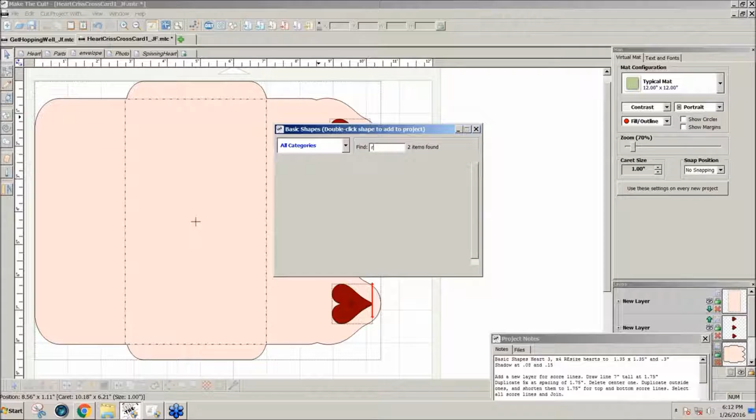So for this one, let's send it to the top here. When you have something selected, you want it to go to the top layer, click on the smaller of the two green plus icons, and it sends it to the top layer so you can work with it. You can just drag it over the existing one, double click and click again to get these angle arrows here. I'll go back to the green mat here so you can see.

I don't need it quite that big. What I did was I started with a 9.75 on the bigger of the two rectangles, 9.75, tab over, and 7.5 inches for the height, and enter. So this is what I started with.

And then again I can do Shift and Control, hold that down and click. And then I'm going to click on the fourth icon from the left to rotate that 90 degrees.

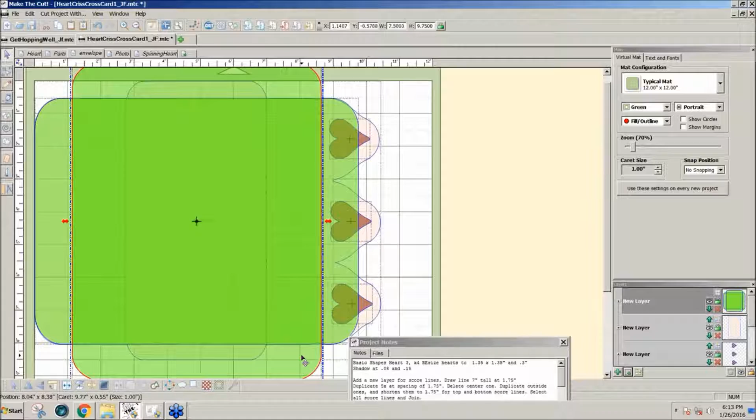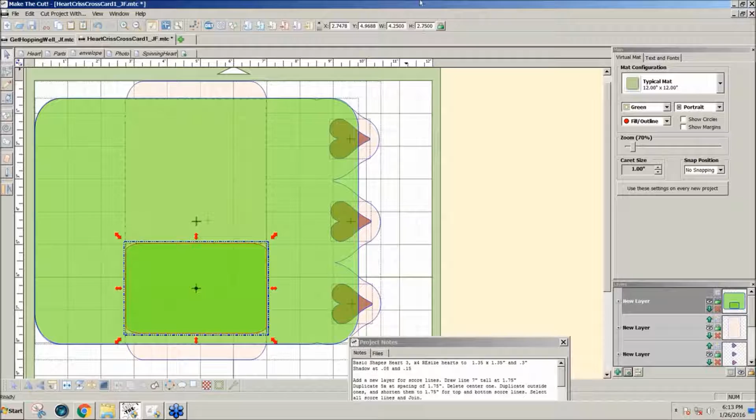I'm going to resize this one at 4 1/4 wide by 2 3/4 high, 2.75, enter, and bring that... it's not 2 3/4, it's 8 1/2.

And then I'm going to bring it up here. So I have this aligned with the 2 3/4 mark here because this is 2 3/4, this is 4.25, and then this side will be the same right now.

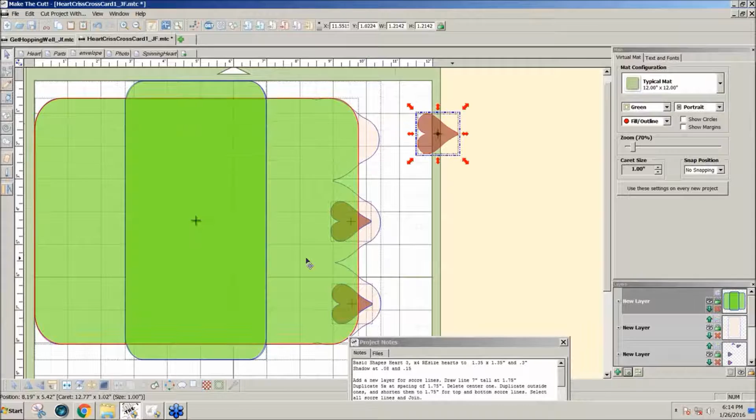And in order to get these pink edges, what I did was take one of these hearts and click on the shadow icon, which is fourth from the right on the bottom, and I made it, I think, a 0.6, pretty big. We'll cancel it, so I'll show you really how I did it.

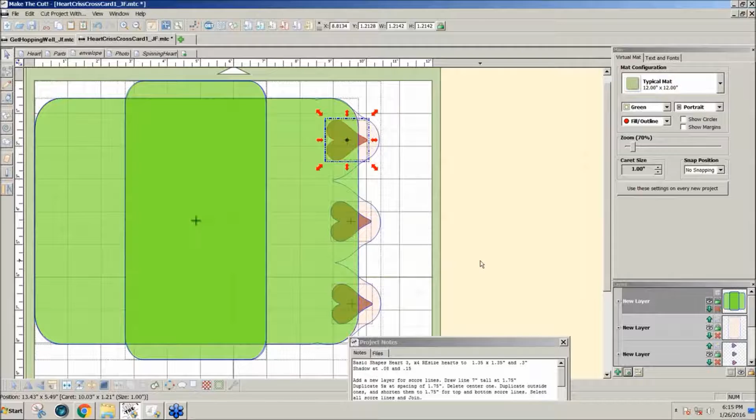I left these here. Now if they're not perfectly aligned, you can select, you can put the first and last ones where you want them to be, select all of them, and I'll type R to line them up on the right so that they're all lined up on the right, the same place.

But if I want to space them perfectly, I can right click, go to Align and Space, and I want to space them vertically, all even. If they were skewed a little bit, that would line them up, the center one, perfectly with the others.

With those three selected, I could join them and then hold a Shift and select this part of the card and type H to horizontally line them perfectly with the side.

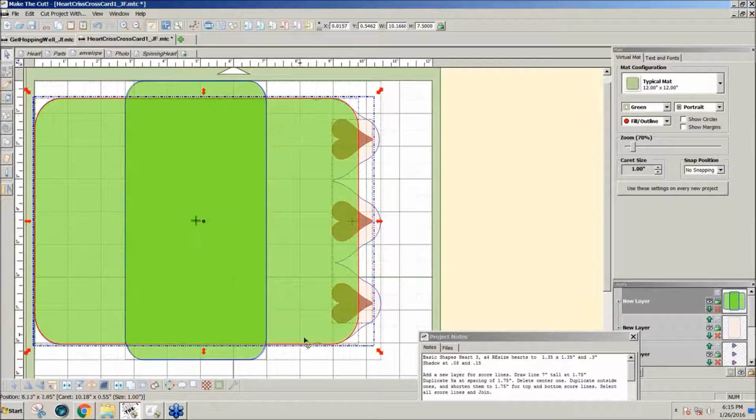So now I have them kind of centered, and I'm going to hide that original one, so this is what yours would look like. Now I'm going to select those hearts.

I'm going to do the shadow with all three selected. My goal is to get the shadow big enough so that it touches, all three of them touch. And I think it turned out to be about 0.6 something.

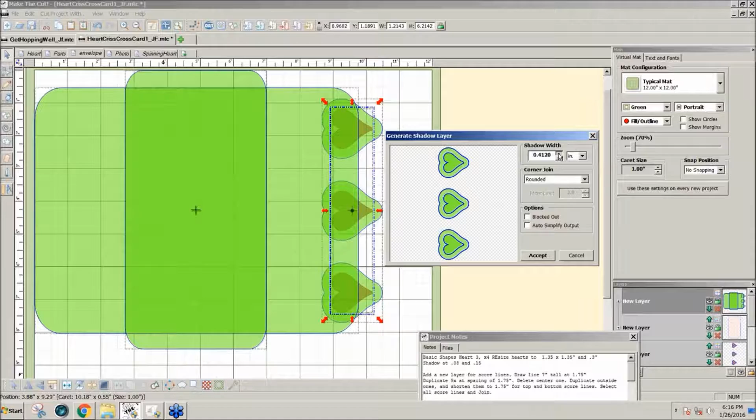So I'll put in the 6. Then we can see. They're not quite touching yet. And also, I want the bottom and the top to line up with this. So maybe I'll back off a little just so that they're not really taller than the edges of the envelope.

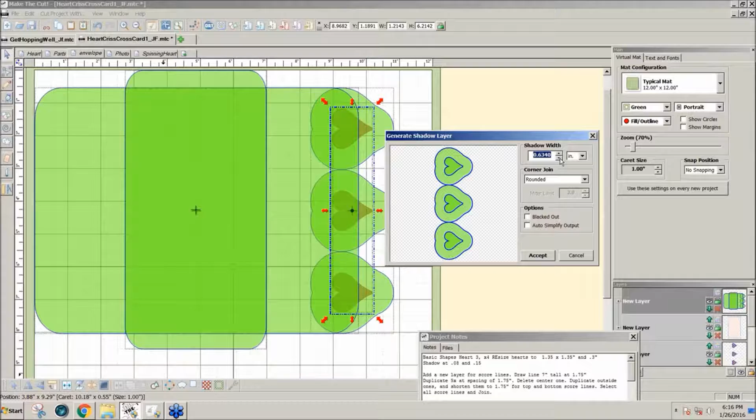So that looks good. I'm not necessarily going to keep them where they are. I can move them in this way if I like.

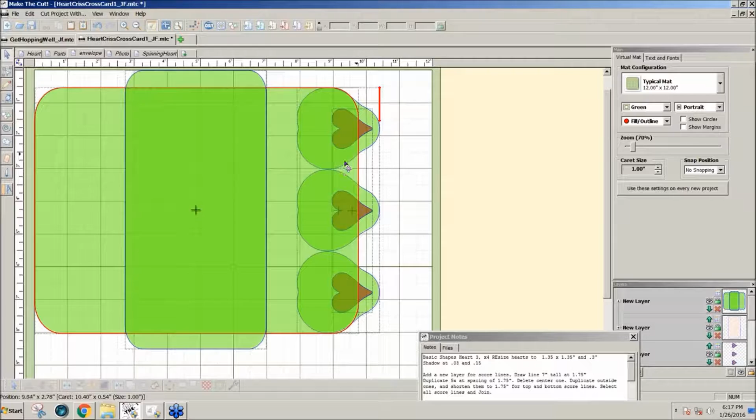And then this one here, notice that this little edge is showing here, and I didn't really want to fill that up. I wanted to keep that heart shape there. So what I did was just slide it over to line up with where the curves from the heart met.

So with that done, I'm going to hide the hearts, and I have one more rectangle to make, and that's the score line in the middle.

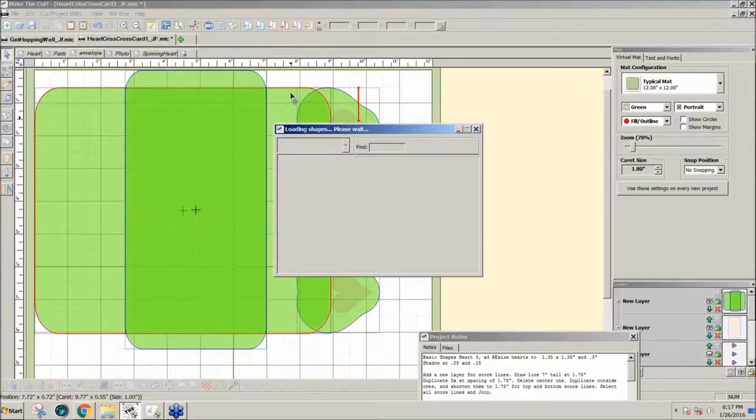So I'm going to add one more square. This time it'll be a square because I don't need the corners rounded. I'll double click, and this one is that 4.5 inches wide

4.5 inches wide, 4 1/4, 4.25, and tab over to the height of this, which was 7.5, I believe, and enter.

And now this is going to be my score line. So I'm sending it to the top by clicking the smaller of the two green plus icons, and I'm going to change its line style to scored

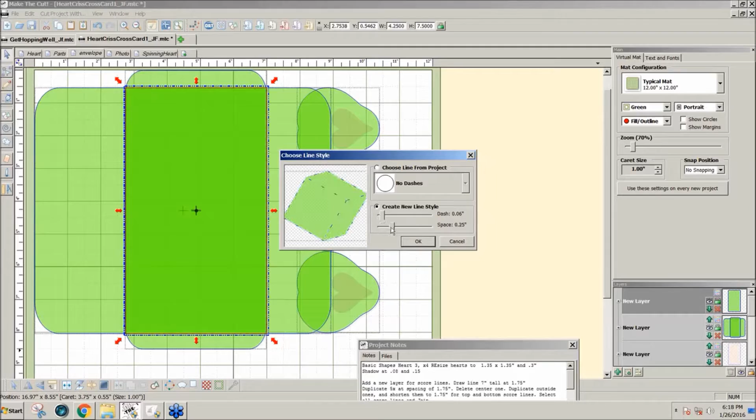and hide it. So now I'm just going to select all the pieces from my envelope and weld them together. Now I can show my hearts, get rid of the empty layers, and right click on the heart layer and move to the top. You could cut those hearts out if you like.